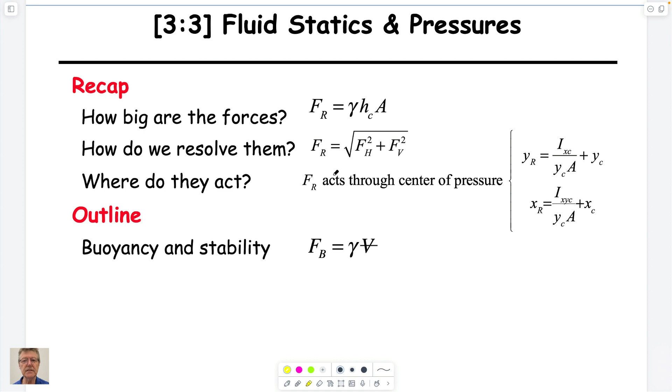Just to recap from last time, I'll go back to the very nice figure I was proud of - you'll see it multiple times in these notes. For these plane surfaces, and it's really been incompressible fluids, these equations always hold: the force acting perpendicular to the surface is always equal to the average pressure on the surface.

That's the first two terms here. You can think about this as being the pressure at the top of this plate, this being the pressure at the bottom - it's a linear distribution. It's a flat distribution if the plate's horizontal, the steepest distribution if the plate is vertical. But regardless, because it's a straight line, the middle point here must be the average pressure - this would be P average, which is the first two terms, which is just the depth of this location below the surface multiplied by the unit weight.

The appropriate point to choose is always the centroid of the plate, which, as we've explained multiple times, is kind of the balance point of that plate, the center of the structure - if you draw a line for a rectangle from top left to top right to bottom left, etc. But the location where it acts is always given by the center of pressure, and you get it by measuring the slope distance down from where the plate would intersect the surface, the x-axis and the y-axis.

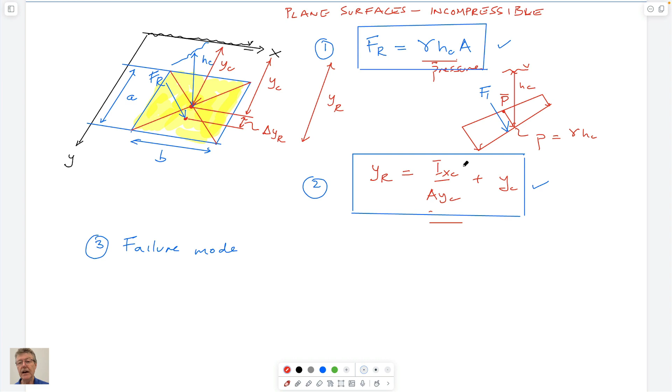It's given by the slope distance of the centroid below that intersection, which is y sub c, plus a small increment in addition to that, which we've called delta yc or delta yr. That's a standard result - it's the slope distance, the area of the plate in yellow here, and the second moment of area about the centroid. This is just a standard result, which conforms to what you'd find in the book if you have it - the edition I have is not the 7th edition you can find for free, it's the 6th edition, but they're all very similar.

We did something with this last time. For a circle, the second moment of area about the centroid is the same for both of these terms. For a plate, which we also used, it's this magnitude here, and the standard result is 1/12 of the width of the plate times the depth cubed. Those are standard results.

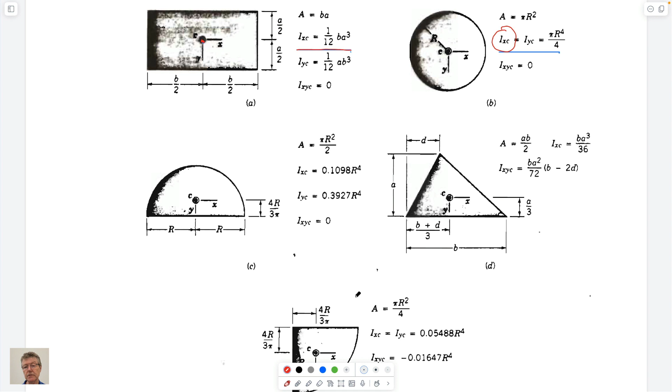It depends on the shape of the plate, not its attitude within the fluid, just the shape of the plate. The centroid of the plate is given by this point here, and it varies for different structures. We'll use this one today to do some examples to finish off what we're doing.

So what we'll do today is move on from planar surfaces to curved surfaces, and then talk about buoyancy as well. That's a summary of what we did last time.

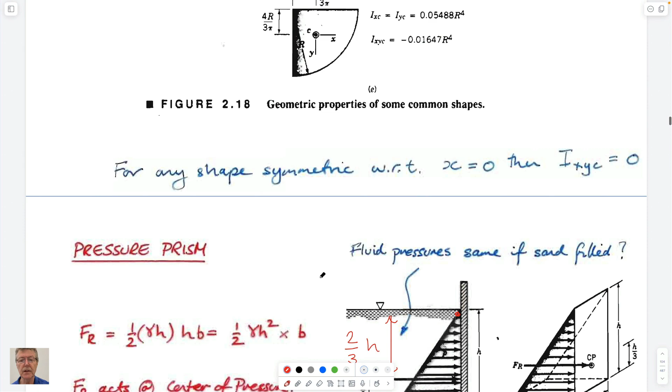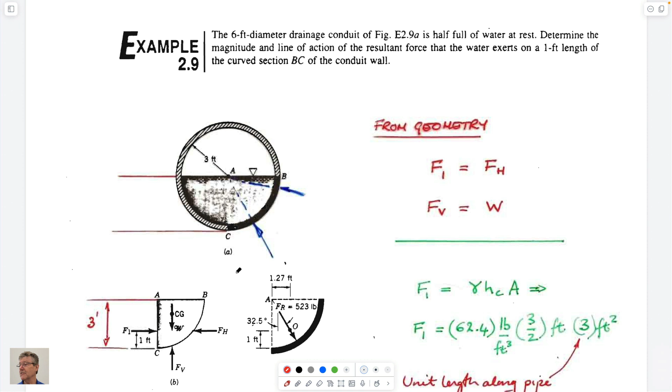So some examples. We'll move on - it's kind of a contrived example, but it serves to make the point about behavior for curved surfaces. The question here is, what are the forces acting on this segment of the pipe if you cut it in half? It's kind of contrived because why would you cut it in half? But let's assume we do want to know that. So for curved surfaces, you could think about this.

We know that the pressures acting on a surface always act perpendicular to it. The resultant force is always perpendicular to the plane. If you think about what this pressure distribution would look like... if you drew a whole bunch of the pressure distribution on the surface, it would be a whole bunch of little arrows perpendicular, and the arrow here would be of zero length, because it's at the surface.

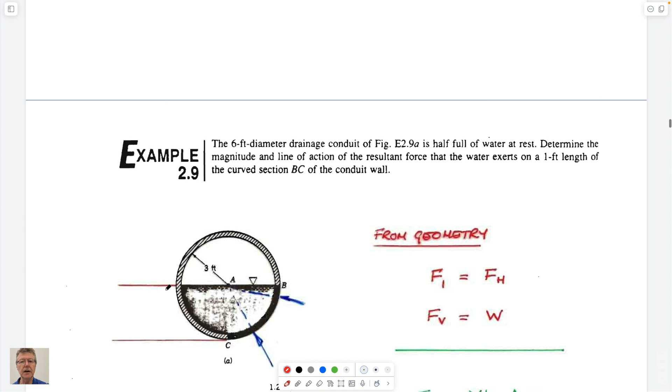So if you wanted to calculate what these forces are, you could make a free body diagram that was just this skin of the pipe, like we did for the rectangular opening gate we talked about last time, just to remind you. We did an example with this opening gate - you have forces acting on this gate, pressure acting on this side, vertical pressure acting on this, and we can take moments around here for the force acting horizontally and the force acting vertically.

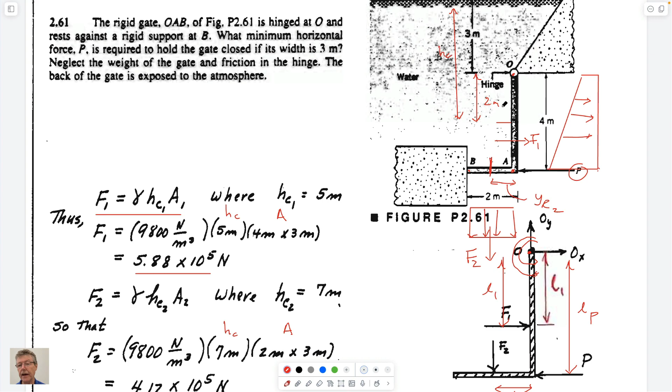So we could also, just as we did for this, draw a free body diagram that just enveloped this gate alone and nothing else, and drew the pressures acting on it. We could do that for this section as well, but that's not very convenient for us to do.

So instead we'll make a free body that cuts this in half, right here, and isolates this free body, which is ABCA. We can look at the force that acts on this, and it has to be reacted against by this, because the sum of forces in the x direction has to equal 0, as do the sum of forces in the y direction, as do the sum of moments, for these systems to be static. We can figure out exactly what the force is that's acting on this.

So the forces acting here would look like this - a pressure distribution like this. We can calculate F1, which is going to be equal to unit weight times the height of the centroid times the area. So this would be the unit weight.

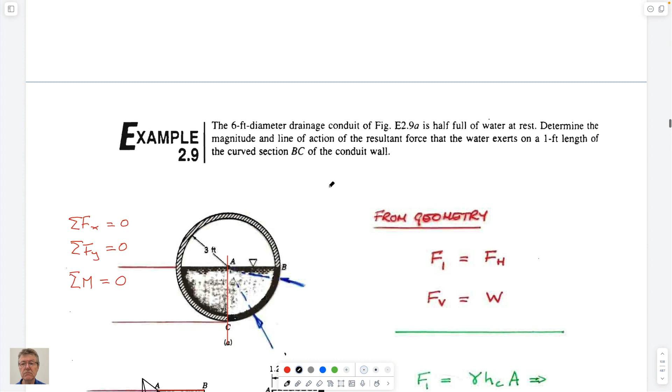What's the height of the centroid? Well, you can think of this as being a plane. The plane would look like this. And if I complicate matters by doing my x, obviously the height of the centroid is half the height. So this would be equal to 3 over 2 feet, because it's 3 feet tall. And the area would be 3 feet times a 1 foot length.

And so this would be the force acting horizontally, and you have that here. So F1 and FH would be the same—they have to balance. We could do the pressure inside here, but we don't.

We have no pressure acting on here, so the force acting downwards is just the weight. So the weight is equal to the mass times G, which is equal to the volume times the density times G, which is equal to pi r squared over 4, you have it here, multiplied by the density of water, multiplied by acceleration due to gravity.

I guess these are English units, so that kind of gets screwed up. And so the volume is pi r squared over 4 multiplied by 1 foot into the page. And so the weight ends up being this, which is the same as the vertical force acting upwards. The horizontal force is this. If you go through the same calculation that we just did, this, I guess, is the unit weight.

Did I write that? Yeah, rho g is correct. This is also rho g. I guess in English units it's just 62.4 pounds per cubic foot.

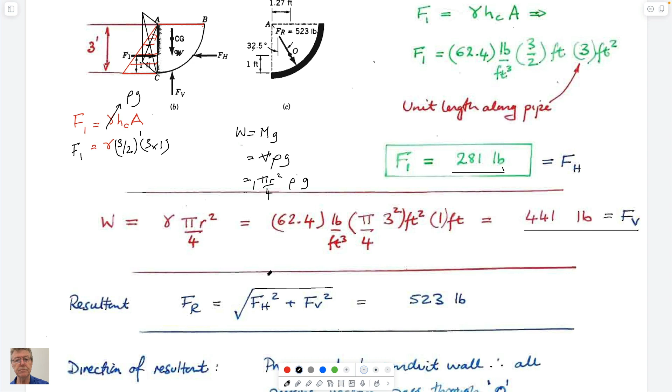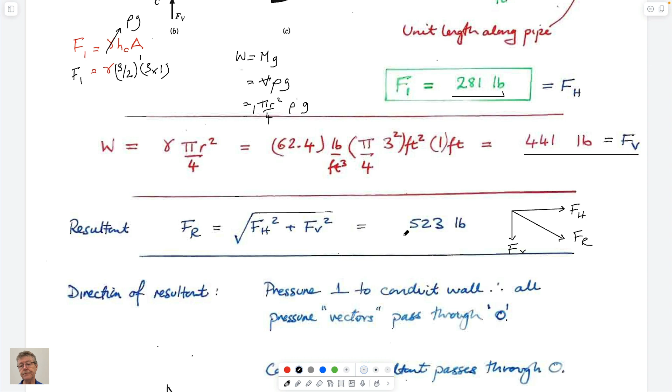If we wanted to, the resultant would be obtained by looking at the sum of those—the vector sum. So we have the horizontal force, bless you, we have the vertical force, and the resultant of those, FR, is just the square root of the sum of the squares of those. So this is just Pythagoras, right? And so the magnitude of those would be equal to FR.

And you can calculate that. It's probably calculated for you. And of course, you can calculate the angle at which it acts because you know the magnitude of FR, absolutely. You know the lengths, each of these individually. So you can just work it out as a sine, if you wish, or a cosine.

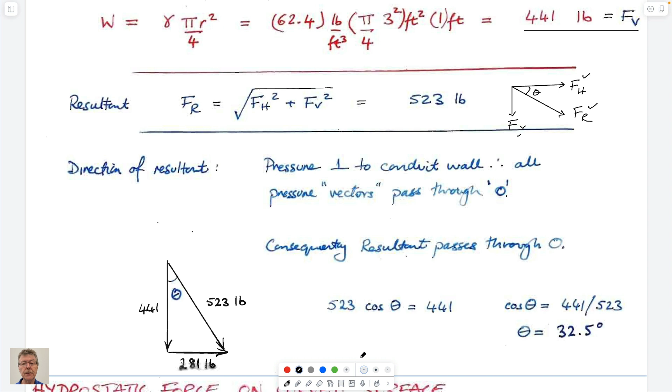And so that's that. I guess the other quirk is that if you wanted to, from what we said, you can rationalize the line of action of those forces. If you think about the diagram I tried to draw before, that gives you the pressure distribution. So if you have all these individual pressures acting perpendicular to this surface, they all, by definition, pass through this point. And so if you can intuit that if by definition they all go through this point, the resultant would also go through this point.

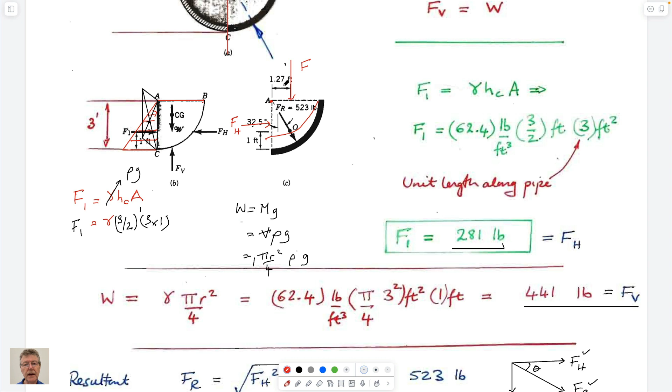And it does. But you can also show that is the case, because if I remove this, you know that you have FV acting here, and you know that you have FH acting here. And so what you could do is you could take moments about this point, and you see that this 1.27 feet is equivalent to the location of the centroid.

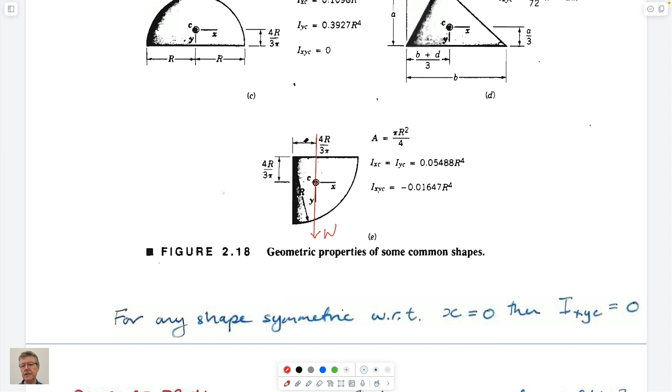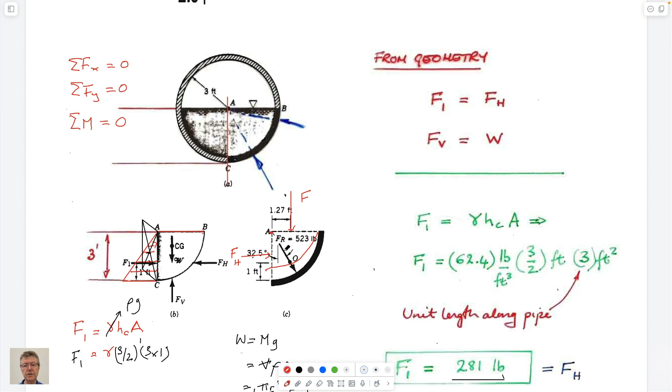So the balance point for this is the centroid—that is the balance point. If you put it on your finger, it would balance on it. And so by definition, the weight of this acts through the centroid, W. And this happens to be 4r over 3 pi, a standard result, distant from this location here. So 4r over 3 pi must be this 1.27 feet that you see here, which is the location at which this acts.

And so what you could do is you could write FV times LV clockwise, counterclockwise, minus FH times LH equals 0.

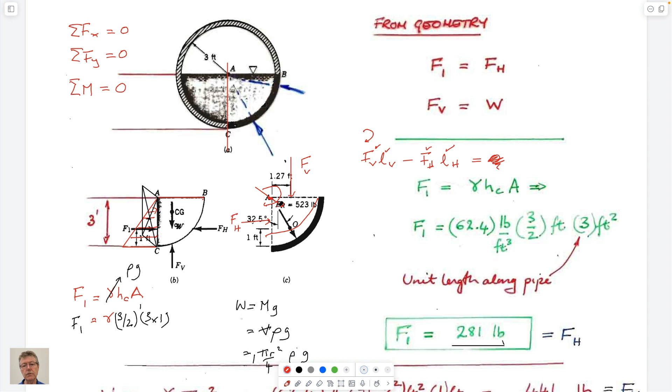And you'd find out that from the magnitudes of these—I guess what are you solving for in this case—you'd find out that since the moments around here are 0, the fact is that the resultant has to act directly through this point somehow. So you have magnitudes for this, this, this, and this. You don't necessarily need to assume this, but if you did that calculation, you'd find out that they sum to 0 because it acts through here. And so from that reason, you know that the points would act through there. Kind of a novelty more than anything else.

So the other thing you could do is you could look at forces acting on where there's not the free surface there. And again, you can do a free body diagram. In this case, the easiest free body diagram would be to take this A, B, C as a separate component. If you looked at the magnitudes of the pressures acting on this, they would look something like this. And if you looked at the pressures acting on here, well, this amount here would be the vertical pressure acting downwards.

This magnitude here is exactly the same as this magnitude here. You could use those distributions to figure out what those forces are, or you could just use what we've done already to figure out those forces.

One way to do it would be to calculate the pressure acting on this plate. F1 would be equal to HA times the unit weight, which would be the average pressure, multiplied by the area AB. So that is the pressure acting here.

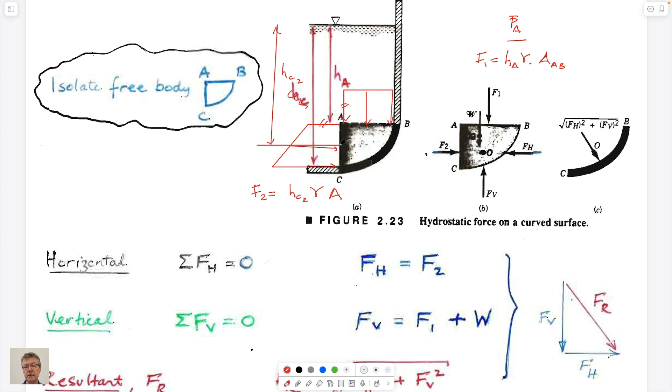Pressure acting horizontally would be F2. F2 is equal to the depth of the centroid. This is not HC, is it? This would be the depth HC2, times unit weight times area. The depth of the centroid would be HA plus half of this height. So you see how to do that.

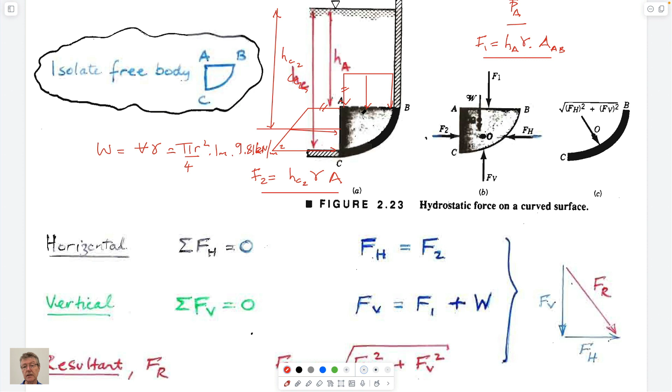Then you can resolve forces. You have a pressure acting on the top, which is this. You have a pressure acting on the side, which is this. You have a weight of the structure, the fluid that's in this enclosure, which is going to be W equals volume times unit weight equals pi r squared over 4 times 1 meter times, if it's water, 9.81 kilonewtons per meter cubed. It's getting crowded.

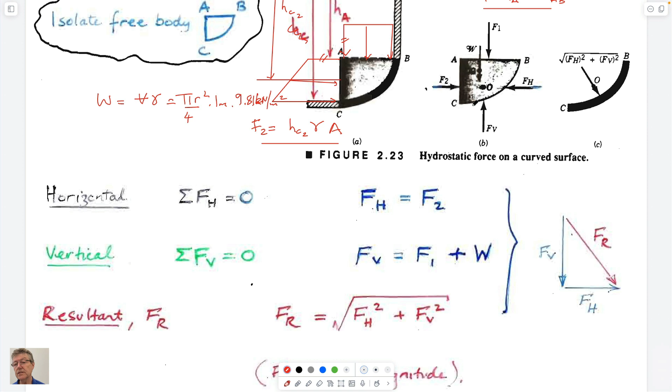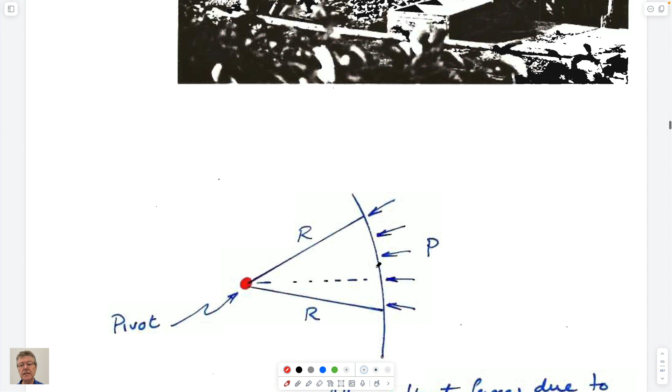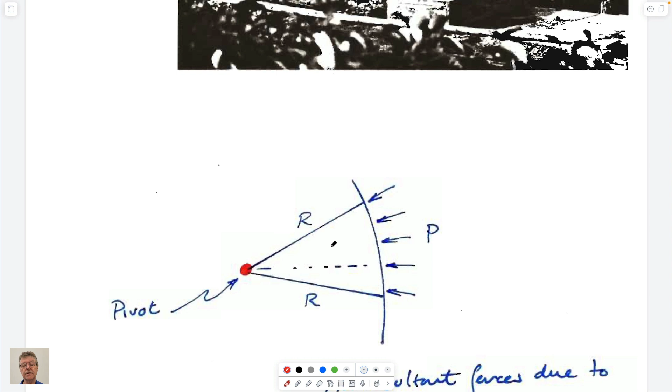And then you just resolve these for the other magnitudes. It's just a matter of being creative about these things. The reason these curved surfaces are curious, and the reason you see sluice gates arranged so they rotate up or down, is this idea of a tainter gate. That is because the pressures acting on the outside of this all act perpendicular to this arc. If it's a circle, it has a fulcrum here, and so the pressures all act directly through this fulcrum. So there's no bending moments applied to the plate, and you can make a gate which is really quite light and available.

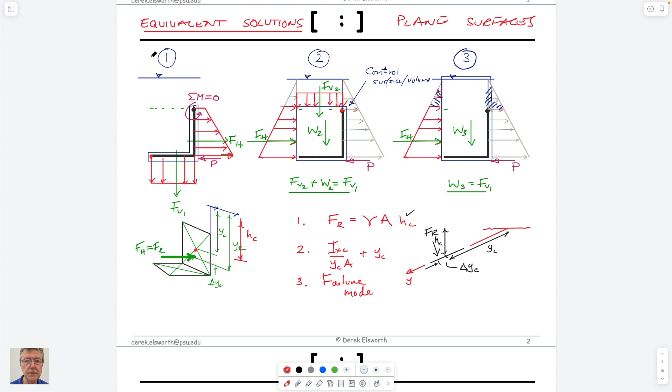So the deal with these things we've just looked at, there's one other utilitarian thing that I have, if I can find it. I think it's this, yeah. This is worth looking at, so it kind of gets maybe a bit confusing because we've done these things so differently. But this is perhaps worthwhile looking at or even taking a photograph of. It's not in your notes, and I don't want to draw it out. But these are all equivalent ways of solving the same problem.

It's the problem we did last time, which is this gate that has a hinge on it. You have a pressure acting on the side, and a pressure acting on the base. The question is, what is the force P that you have to apply to keep it shut? You can skin that cat three ways if you want. This is the way we did it. We calculated the pressure, drew a free body just around the gate, and calculated the pressure acting on the inside of this, which was a linear distribution of pressure. It's not zero at the top because it has a certain height.

We can calculate this by just using this equation here, right? We just need to know exactly where the centroid is on this. The centroid would be halfway down this, the depth that's halfway down this, depth from the surface. And we can do the rest of the calculations. So this is the way we did it. We got a force horizontally, we got a force vertically, and then we resolved the moments around this hinge to calculate exactly what the magnitude of P is, the unknown. It has a known lever arm length, but we don't know what P is, but we know what the others are.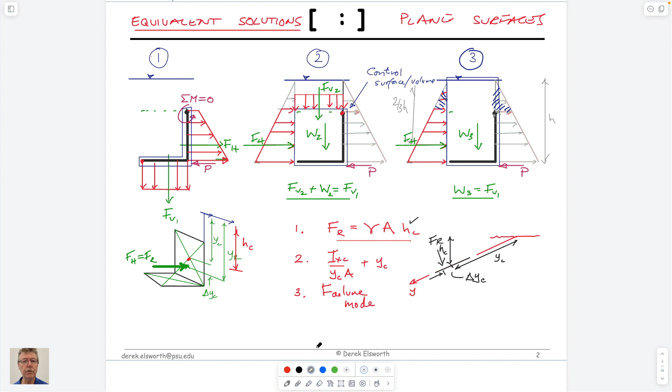That is all I want to say about that. What else? We're going to talk about... don't talk about that, don't talk about that.

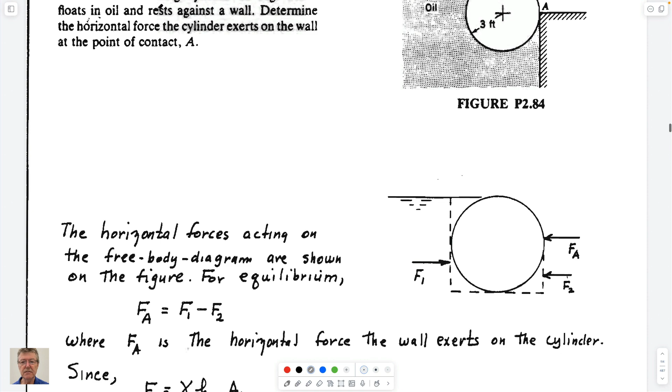Another example, just a quick example, concepts rather than anything else. Then we'll talk about buoyancy.

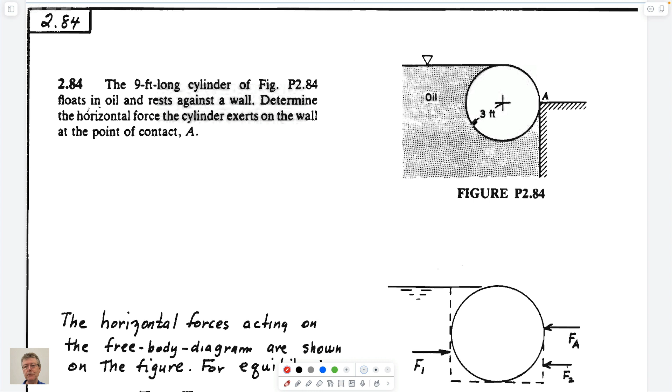So what's the forces acting on this structure? And so you have oil. I guess you're unlikely to have oil with a 3-foot radius, 6-foot diameter buoy sitting in the water, but anyway, given that that's the case, what would the forces acting on this be?

So one way to solve this, if you want to calculate the horizontal forces, is to realize what the pressures are that are acting on this. What you could do is isolate this with a free body, and the free body they've isolated it with below looks like this. That's kind of funky, it puts a magnifying glass on it.

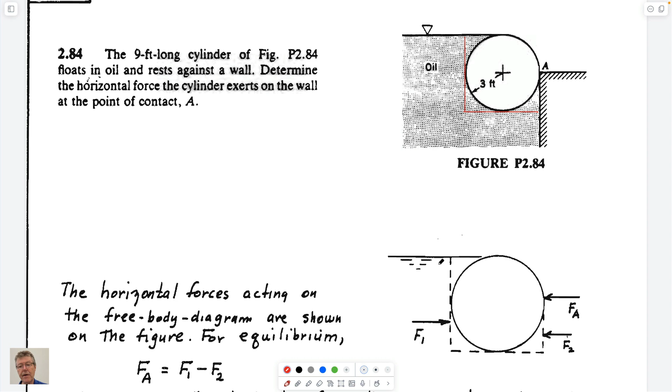So you isolate this, and you look at the magnitudes of the forces that are acting on this. And you know that the pressure acting on this is going to look like that.

You might be interested to calculate the behavior from that, or you might want to just calculate it from our standard result. It's easier probably to get it from the standard result. The standard result would be, if I draw the actual shape of the gate, it would be like this.

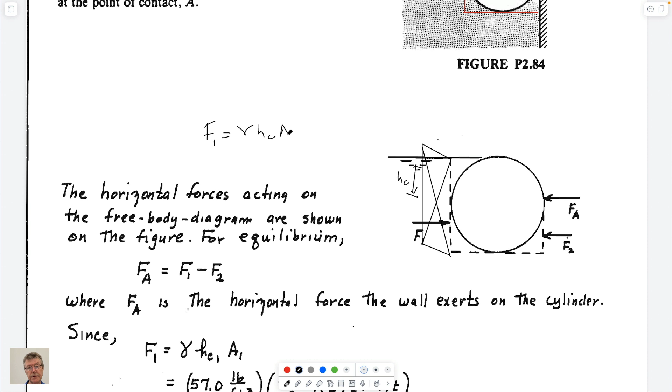HC, actually it's equal to YC as well now. So F1 is equal to unit weight multiplied by HC times the area. The first two terms are just the average pressure.

What's the pressure distribution acting on here? Well, it's a tricky problem, I guess, in that if you think about it, what we said is that if you go from any point at the same elevation, dP/dx is equal to 0, which means that if you go from this point here all the way to this point here, the pressures have to be the same.

And you know that the pressure at this point on the left-hand side has to be equal to this. So the pressure, by definition, at this point here, has to be equal to this magnitude here. And I guess also the pressure at this point here, if you go from here to here, I want to draw a straight line. If you go from this point to this point to this point, these pressures all have to be equal. And so the pressure distribution on this side is equal to this.

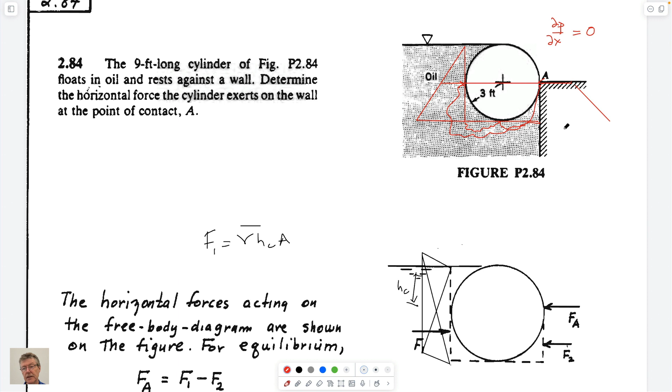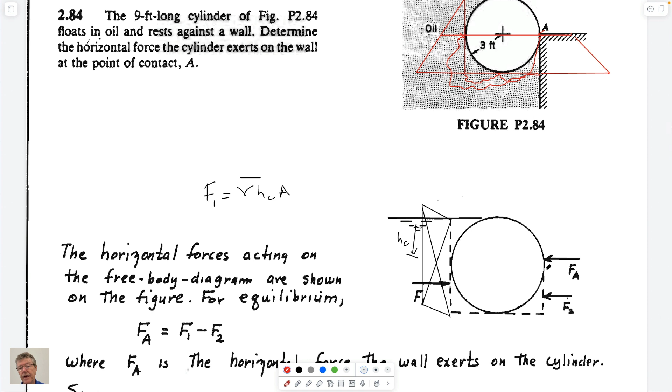And so the average pressure here would be, well, what's it going to be? If this is HC, the average pressure here is going to be: F pressure at A is equal to HC multiplied by unit weight. The pressure at the base is equal to 2HC times the unit weight.

And the average pressure is going to be the sum of those two divided by 2. The pressure average is equal to PA, this is kind of a convoluted way of doing it, divided by 2, which is equal to HC plus 2HC over 2, times unit weight of oil, I guess.

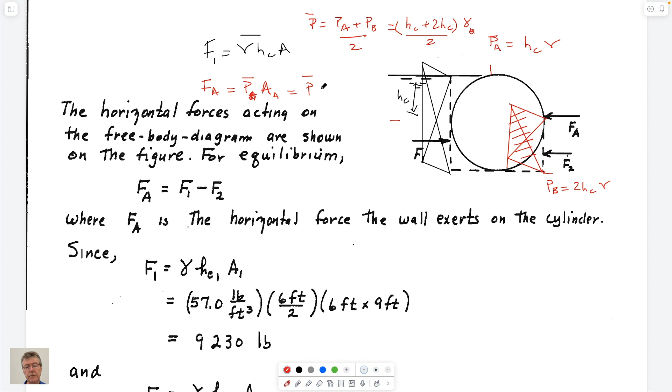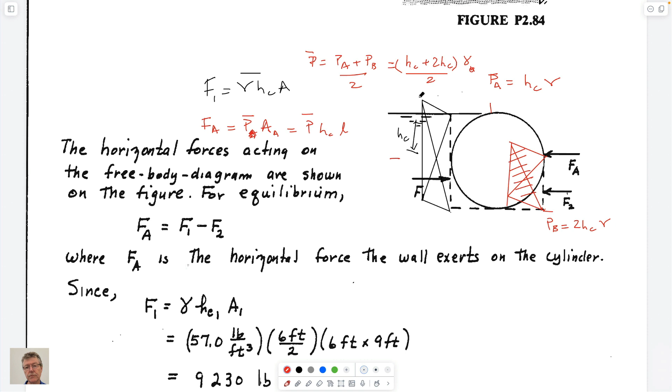No, P average times A sub A, which is HC times the length into the page. Don't know what that is. Times length, whatever this length is here. So I don't think I did a very good job on that, and they solve it slightly differently, but that's the way to solve it.

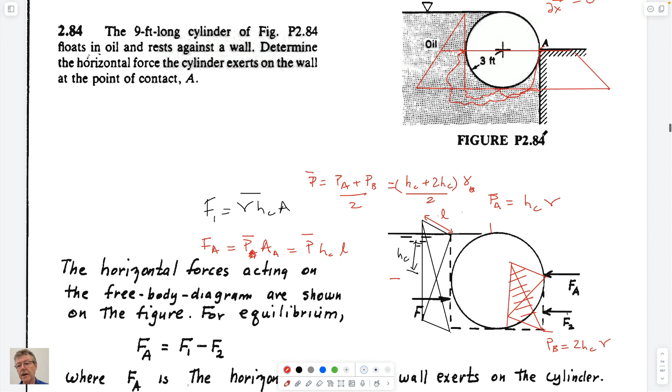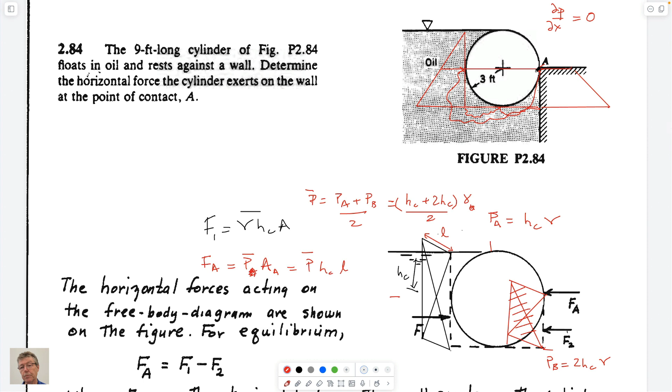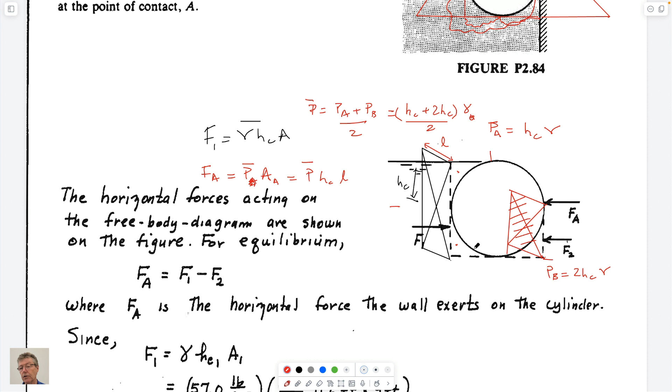I guess the only important thing about the problem is that this is zero. That's the trick to realize. And it's zero because you realize that the pressure here has to be the same at this elevation at both places. And if you resolve horizontally, you don't care about these individual forces due to these weights because you're only resolving horizontally, and they have no component that acts horizontally because you've isolated them. So, yeah, I didn't do a very good job on that, but anyway.

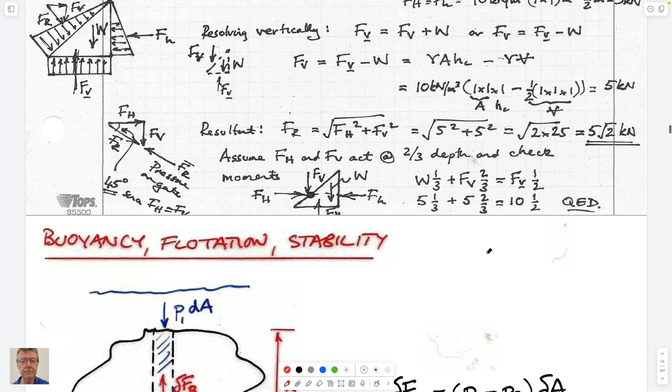So the final thing that we might talk about is to talk about buoyancy, and maybe just go back to write something down. So the other parameter that we'll deal with is buoyancy.

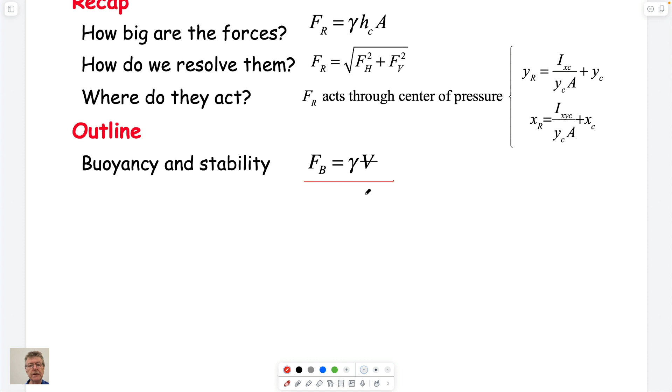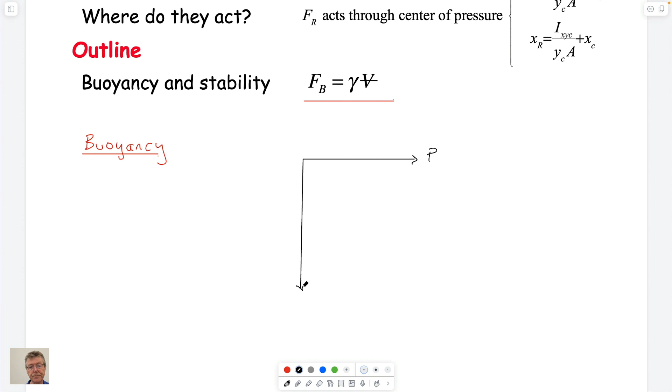This comes from understanding what we've talked about so far. If we talk about pressure versus depth, we've drawn these figures before. Let's call this H rather than Z, since we're going down. Pressure equals the unit weight times H, with H vertically downwards. So if this is the surface of the liquid, and we have a block below here, then if we go across, between H1 and H2, we know the pressure acting here is this amount.

So we could imagine we have a pressure acting on the surface, which is P1 equals H1 times gamma. We know we have a pressure acting here, which is equal to P2. And P2 is just equal to H2 gamma, equal to this amount here.

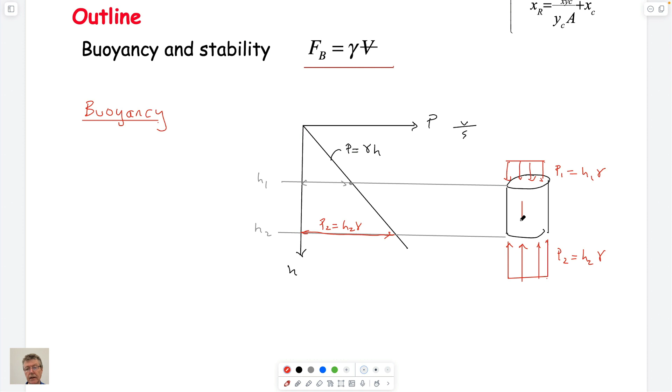And we know we have a force acting downwards, which is W. W would be equal to H2 minus H1 times an area, multiplied by the unit weight.

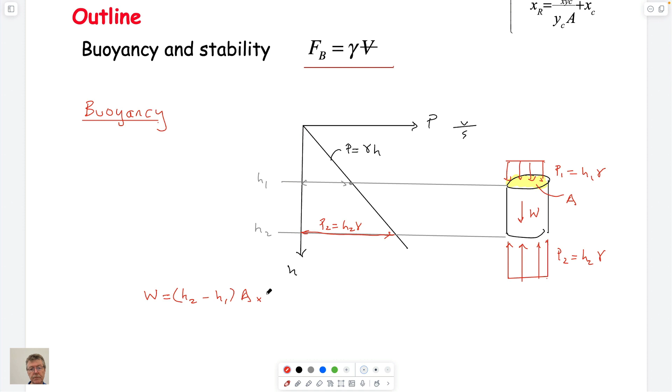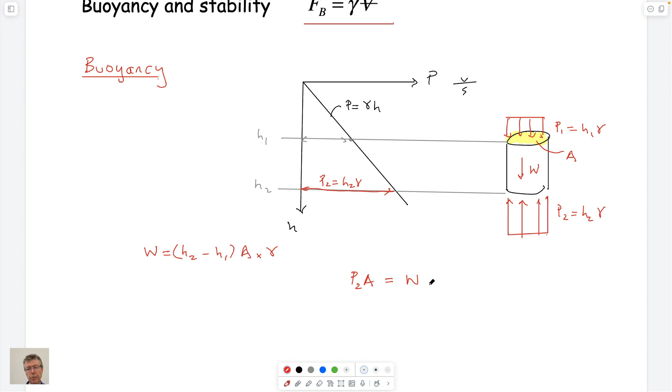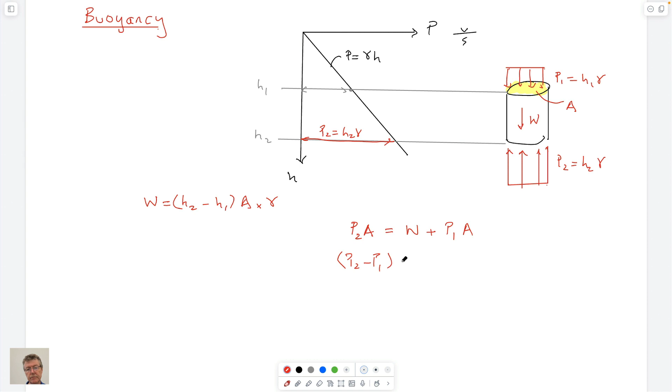We know this bucket is kind of in equilibrium. If we do a free body diagram, P2 times A, acting upwards, has to be equal to W plus P1 times A. So we can write P2 minus P1 times A equals W. If we populate this with all the components, this is A times H2 minus H1 times unit weight on both sides, so they're equivalent.

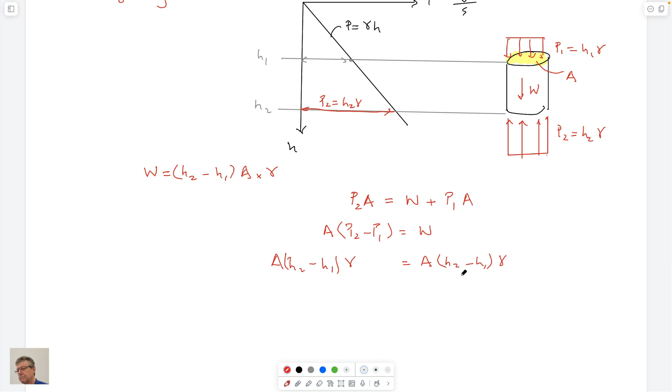So this is really saying that the weight in here is exactly balanced by a larger pressure acting up than pressure acting down, meaning it's in equilibrium. This expression is derived from dP/dz equals minus gamma, which is directly derived from F equals ma, where acceleration is zero. So this is just a statement that the sum of the forces equals zero.

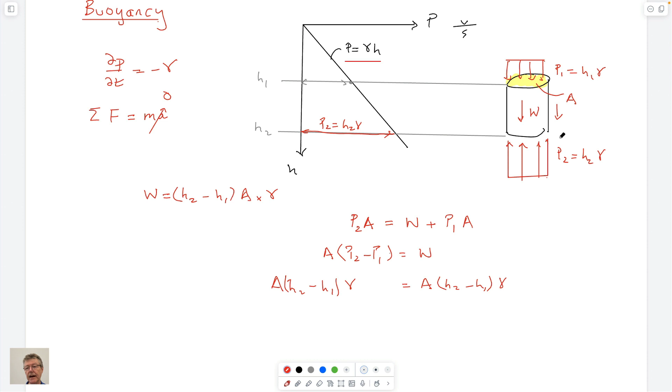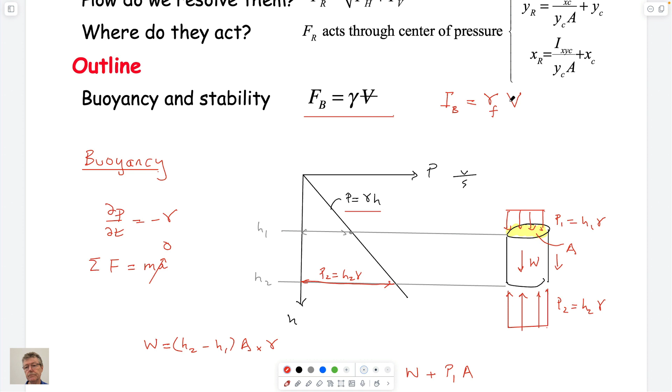If you take this away, to hold it in place you need an equivalent force acting downwards, equal to this. So the buoyant force acting upwards is exactly this, and it's always this. The buoyant force equals, as you know from Archimedes' principle, the unit weight of the fluid displaced - the water taken out of this bucket - multiplied by its volume. That's merely where it comes from. It's just a force balance like we've had for other components in this class. So that's the buoyant force.

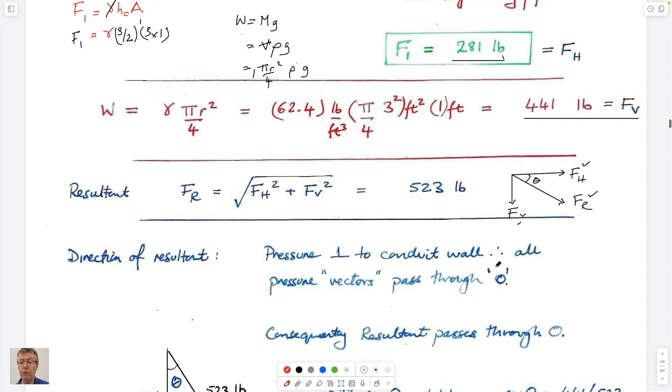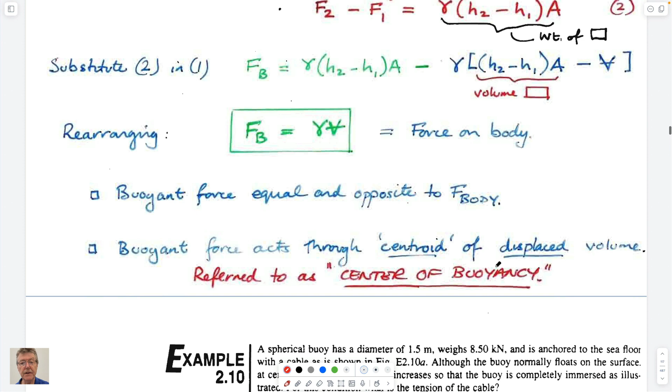We can use that the same way to calculate forces on structures. This is a derivation here - same derivation, don't need it - and you can solve for simple structures. This is kind of the same bucket diagram: a pressure on top, a pressure on the bottom which was bigger. The sides would also have pressure acting horizontally, but those wouldn't count if we're only resolving vertically.

If we have a buoy, a spherical buoy, you can imagine the pressure acting on it is perpendicular to the surface everywhere, so it'd look like this collar. The pressure at the bottom would be larger than at the top. But this pressure distribution would be manifest as a buoyant force, equal to the unit weight of the displaced fluid that isn't in the buoy - the evacuated buoy - multiplied by its volume.

Always the case. This allows you to calculate, again with free bodies, what tension you need in a cable to anchor the buoy at a particular location, just by doing a free body. In this case, you have a tension pulling it down, the weight of the buoy itself - the plastic orange buoy has some weight to it - and a buoyant force acting upwards.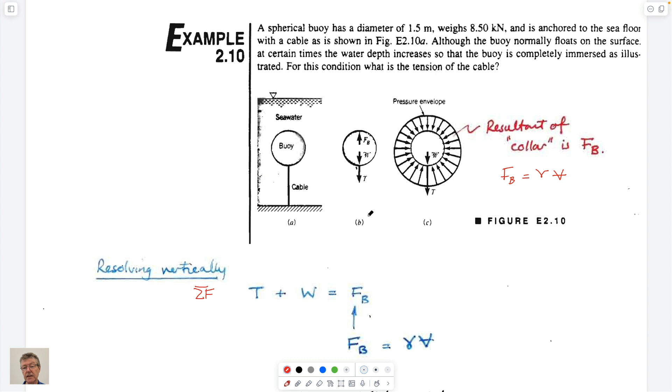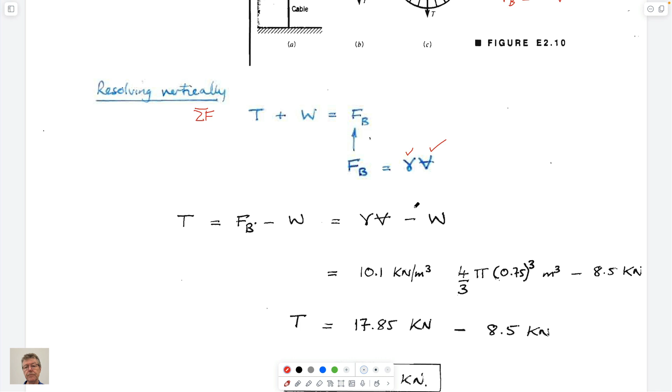You can just resolve the forces: acting upwards, acting downwards, so the sum of forces equals this - T acting downwards, W acting downwards, and the buoyant force acting upwards. If you know the volume of the buoy, the unit weight of what it's displacing (water, or seawater with unit weight 10.1 instead of 9.81), and if you're given the weight of the buoy, then you know everything to calculate the one unknown, the tension. Just resolve it. That's it.

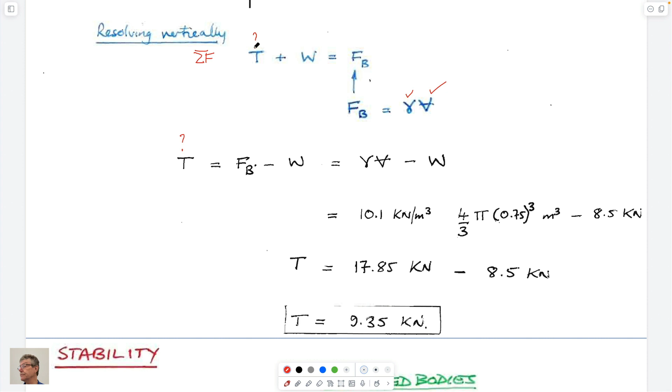And so that's an easy enough thing to do. We've talked about balloons as well. So a balloon is just sitting there - we talked about how they work. And we rationalized the fact that if you take a free body around the balloon, it's a bit different, isn't it?

The pressure acting on the balloon from the atmosphere is some amount. The pressure acting on the bottom of the balloon probably doesn't change very much and is roughly the same amount. So the only way you can get a balloon to work is by making the density inside lower, so that the weight, as it was in the bucket underwater - we took the water out of the underwater cylinder, and because the water was no longer there, it didn't have the balancing weight to keep it in place. Here we want to remove some of the gas in here to make it buoyant so that the density in the balloon is less than the density in the air.

So rho B is less than the density in the air. We talked about the only ways we can do that, for instance using the ideal gas law: P equals rho RT. Rearranged in terms of density, it's equal to pressure divided by the gas constant for whatever the gas is, multiplied by its absolute temperature - this would be the balloon.

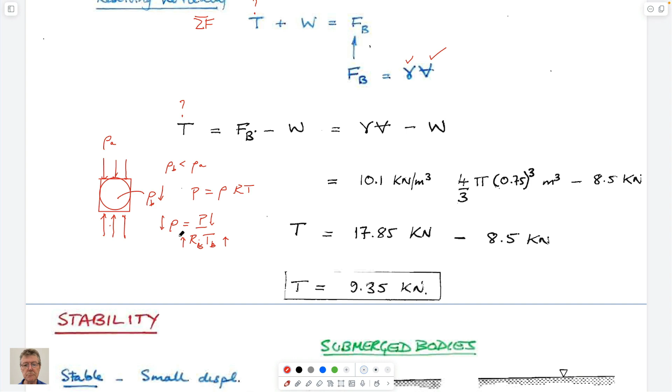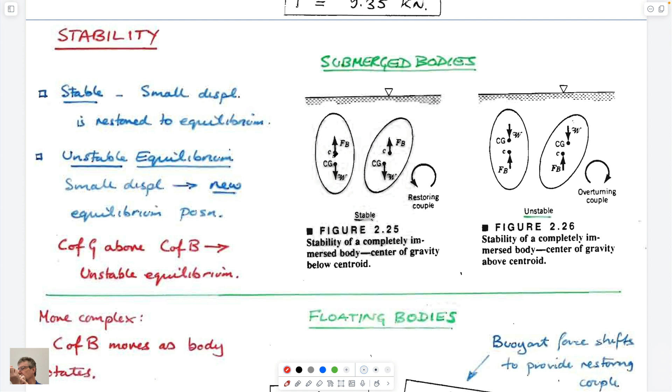The other thing to close out on this is stability. If you think about a submarine subsurface, and you somehow balance it on a pin inside the submarine, the point at which it balances is the center of mass, the center of weight of that submarine being held in the air. That would be the midpoint of this piece of paper, if this was the section of the submarine. So the weight of the submarine acts through the center of gravity, and the buoyant force acts through the center of buoyancy, lowercase c here.

If the center of buoyancy is above the center of mass, the buoyant force acts there, and you can think of the weight of the submarine as hanging off that - if it's below it, it will always be stable, like holding something on a piece of string. If you try to hold it where the center of gravity is above the buoyant force, then it's unstable. If the center of gravity is above the center of buoyancy, putting the submarine off kilter by a small amount creates a net moment which, if it goes further to the left, will grow and grow until it turns upside down.

This is the principle of having a keel in a sailing boat - you have a center of gravity which is low, keeping the boat upright, so you can have big forces acting on the sails and also the buoyant force acting on the boat, and it will always be stable. The converse is unstable. It's easiest if the whole body is submerged, because the center of buoyancy will always be the center of that submerged shape, which doesn't change.

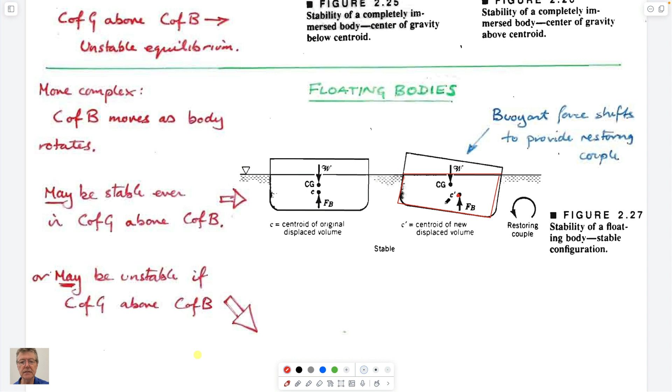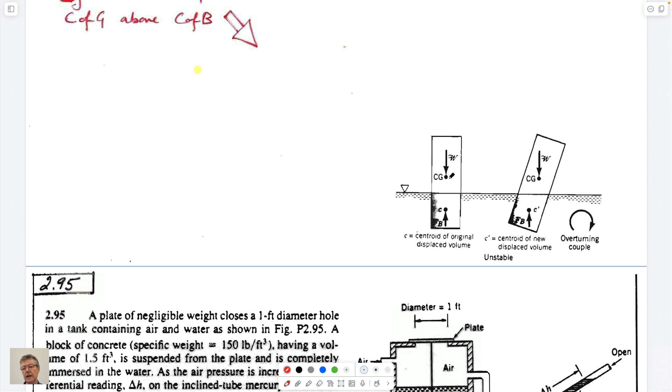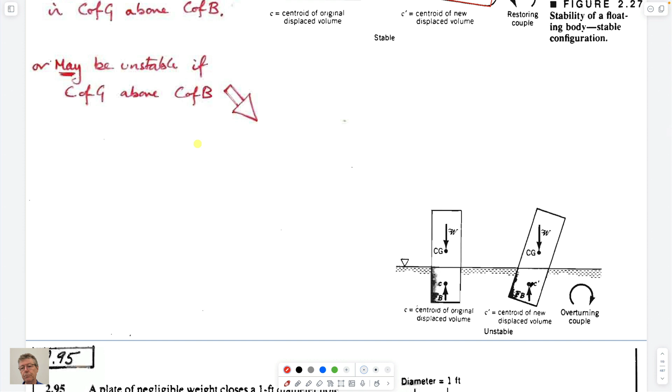So the difficulty for a floating boat is that the location of where the buoyant force acts changes with the attitude of the boat. That's just a point of note. The keel on a boat, if the center of gravity is above the center of buoyancy, then you have the same thing occurring as in this example. It's just that in this case, the center of buoyancy would actually change because the shape of the boat is changing. More complicated than we need for this class.

One example, we won't get through it, but we've got a couple minutes, maybe just say something about it. This question asks: if you have a plate held down by a weight that is submerged in water, what pressure do you have to apply on this plate before it lifts up? I guess you just need to realize that if you're applying a pressure on this plate, it would look like this.

So this is the pressure of air. The force would be equal to the pressure of air times the area. So if you increase the pressure of air, that force will increase. What's going to happen to the weight of this? Well, you'd kind of think intuitively that if you're putting pressure on this, you're also putting pressure on this surface, and that should affect this. But it really doesn't. Because if you think about it, the reason this has a buoyant force is because there's a pressure acting on the top here, which is less than the pressure acting on the bottom.

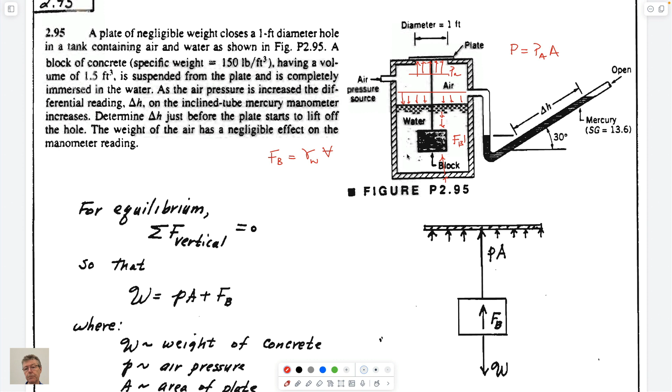The buoyant force will just be equal to the unit weight of the displaced fluid, water in this case, multiplied by the volume of the brick. It doesn't change. So if you go through this, you can just see that that's the free body: the weight of the brick, the pressure acting in this cavity multiplied by the area of the plate, and the buoyant force also acting upwards. So the net force on this is controlled by this.

The only thing you don't know is this, and you can solve for everything else. You know the area, so the only pressure you don't know is this. You solve for the pressure as a function of the known weight of the brick and the known displaced volume of water and its density. Solve for pressure - if you know what the pressure is, then you know what PA is. It's a gas, so you know that PA is also acting here.

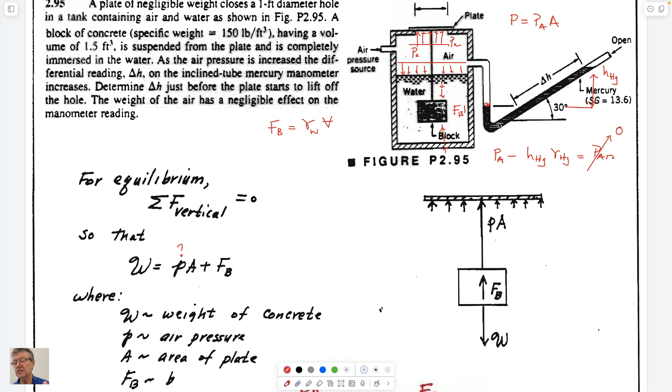So you can write the manometer equation: PA minus, if this is mercury, times the unit weight of mercury, equals P atmospheric. And if we're taking gauge pressure as 0, this is 0. So you know the pressure, you know the unit weight of mercury, so you can calculate a height - and they're actually asking for delta H, which is just the sine of that height. So you have the solution there.